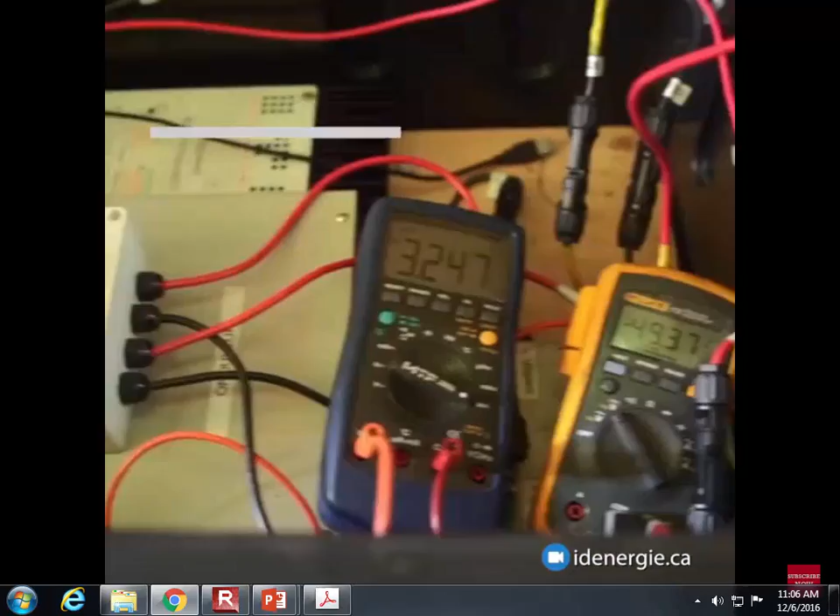How they tether the turbine to the bottom of the stream bed, I'm not sure about that, because potentially if you had a really heavy flow, it could get washed downstream. It looks pretty heavy, but another thing that I wondered about is bed load, the boulders that are on the stream bed. If you have a heavy stream flow, then those boulders will start moving, and I wonder if they've tested those to see what sort of a rock collision it can stand up to. But it seems really cool.

I'd love to have one at my house. Free electricity, it's the dream.

All right, so on the subject of hydropower, one of your problems for the assignment that's due on Thursday is this one, and it describes a similar situation, a house where they have an elevated reservoir and a penstock, which is just a pipe connecting the elevated reservoir to the generator shack. And there's 34 feet of head between the two reservoirs.

This problem is in mixed units, because although the length measurements are in feet and the flow rate is in traditional units as well, they want to know the power in terms of kilowatts. So we'll have to deal with the mixed units a little bit. Obviously, since we're in Chapter 7, the energy equation is going to be a big part of this problem. So there it is. You've seen it before.

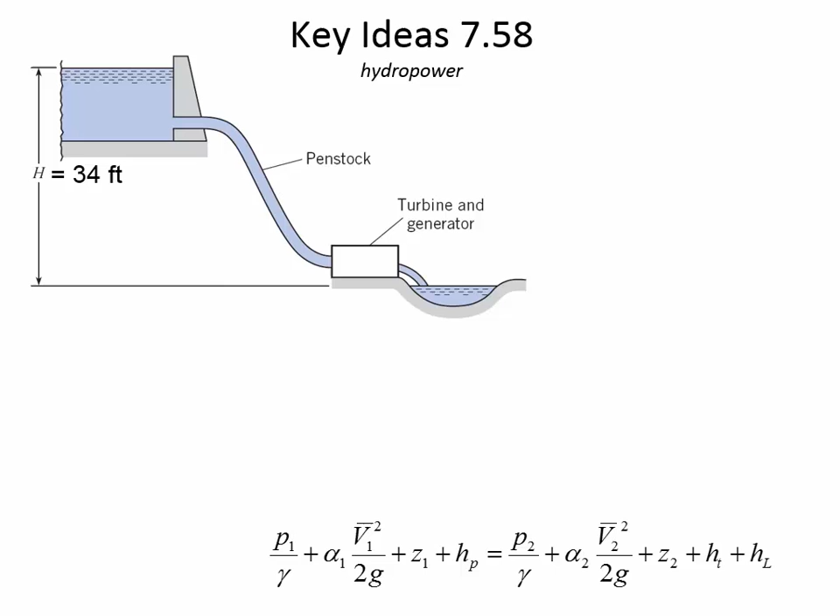They're asking to find how many kilowatts this situation can generate, first if there was no head loss and 100% efficiency. But then in the second, more realistic situation, of the 34 feet of head that's available, you have some allowance of around 5.5 feet due to head losses. That can account for both the pipe friction and the local losses at the inlet and through any bends that may exist.

So you allocate 5.5 feet of head to losses, and then you consider the efficiency of the two machines involved. There is an efficiency lost with the turbine, and another with the generator. We've talked about efficiency before and how that affects the power equation. Here's the power equation, and if it's 100% efficiency, you just use it as written. But we're trying to find how much power can be generated with a 70% efficient turbine and 90% efficient generator.

In the past, I've only given you one efficiency factor. You've never had to have two of them. So when you had one, in a situation like this, would you multiply by the efficiency factor or divide to find out how much power can be extracted from the system? Multiply, right, because any reduction below 100% efficiency gives us less power coming out. If you divided by 0.7, that would mean you actually have more power coming out because of the losses, and that doesn't make any sense. So you can always reason through the situation.

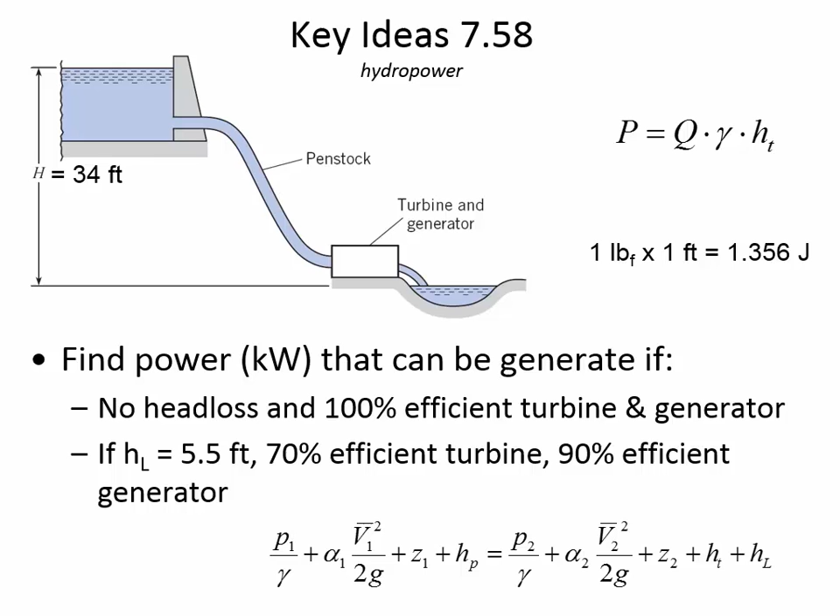So a joule per second, remember, is watts, and then the flow rate component will have seconds in it. So as you look at the units in this problem, it's in your book, but it's also here on the slide that there's 1.356 joules per foot-pound of force. All right.

Here's the last one I wanted to discuss with you, and that is you've got water flowing from one tank to another at a flow rate of 16 cubic feet per second. And again, we know the lengths of the pipe, the diameters, and they've even gone so far as to calculate the cross-sectional areas for you. What a nice gesture.

You have to calculate what is the elevation in the left reservoir that's causing this to happen. And that elevation will only be valid at a certain instant in time because, as the water is draining from the tank, the elevation is going to be getting lower and lower. So the elevation that you're calculating is at the point of time where the flow rate is 16 cubic feet per second.

Now they do give another formula for energy loss due to pipe friction, and an important thing to keep in mind is that you have two pipes with different diameters. So that means the velocity is going to be different in the small pipe compared to the large pipe here. So you can't just add the two lengths together. It would be wrong if you said L equals 500 and then you picked one of the velocities to put into that formula.

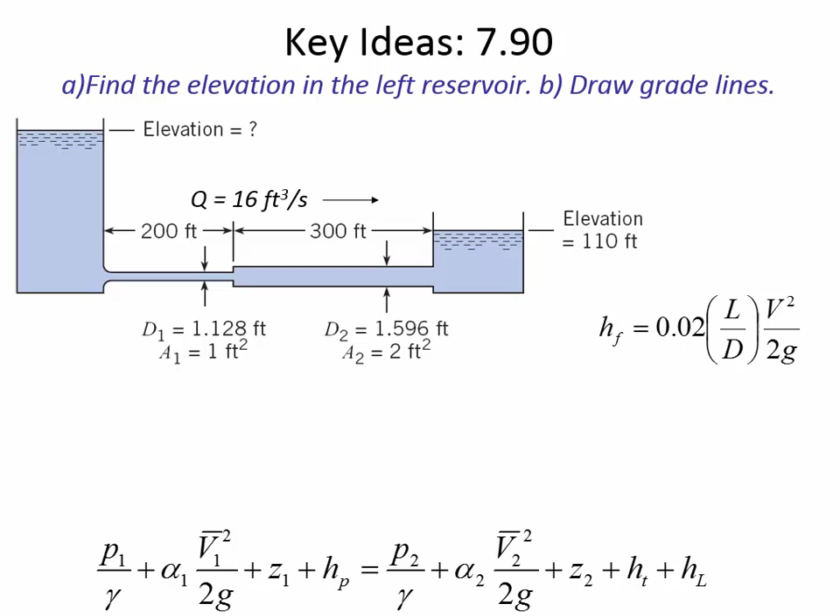The head loss through the first section has to be calculated using that section's length, that section's diameter, and that section's velocity. And then you also calculate the energy loss through the second section. But that's not the only energy loss, the pipe friction. In this one, you're actually also supposed to consider two local losses. So have a look at the picture. Where do you think the two local losses are that you're meant to consider?

Very good, the abrupt expansion. And the formula that you saw in class previously for head loss due to an abrupt expansion is one of the velocities minus the other squared divided by 2g. So that's the energy loss in an abrupt expansion. Where's the other one? They're saying that there's only two local losses. And so the expansion of the pipe is one of them. So now you've got to pick between the other two.

She said the inlet, meaning where the water's going from the tank into the pipe, and then the outlet. So you're saying the outlet? Yeah, and I think the reason why is that you see how they've got this taper on the drawing? You can minimize the energy loss by gradually transitioning the flow into the pipe. And even if it was an abrupt inlet, that's only 1/2 of the velocity head in comparison to all of the velocity head at the outlet. So if they're going to force us to choose which local losses to consider, I think it's the transition and the outlet that need to be considered.

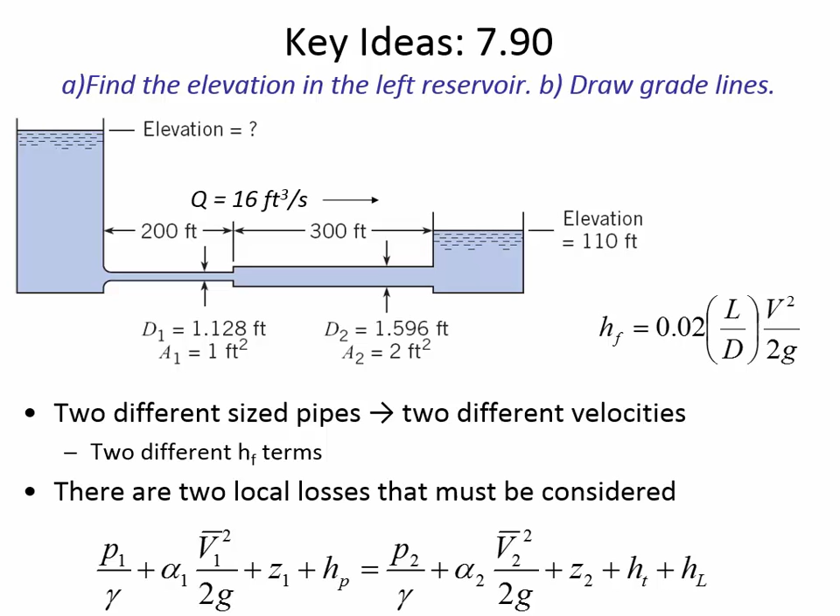We're not in a particular rush for once. It's the end of the semester and we got where we needed to be. We're not trying to make up time, so.

All right. Let's work through this one. This is a fairly complicated example that is going to give us some experience applying the energy equation with pumps. We have a tank that supplies our network, and we know the water surface elevation at the tank, and water goes into the pipe through a pump around a series of bends. We've got a couple of K values which define local losses, and then there's a building on a hill,

and anytime you look around at the rich people who live on the top of the hills, at least take comfort in the fact that they don't have good water pressure in their shower.

All right? We're going to take a look at this example here.

Ultimately, in part C, we're going to find out what's the water pressure at the top of the building. Because, you know, this pump is adding the energy that pressurizes the pipeline. It can only add so much. And in a city, if you add too much pressure, then the people who live at lower elevations are going to have their water heaters start to leak. That's usually the thing that leaks first, is water heaters.

And so there's only sort of a narrow range of acceptable pressures. Typically, it's from about 250 kilopascals to maybe 850 kilopascals. So there's kind of a narrow elevation range that you can service with a single pump. Yeah? The regulator can't change the pressure that comes in from the street.

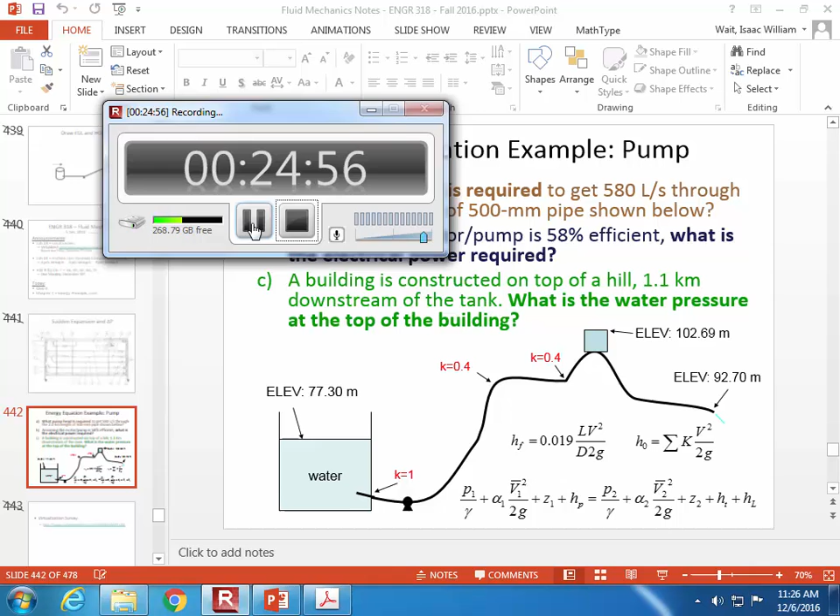Let's double check some of these numbers. All right, so hopefully you got that the cross-sectional area is about 0.196 meters squared, and from that you can get the velocity through the pipe, 2.954 meters per second. And then if you put all of that into the formula for the head loss due to pipe friction, you get that there's 33.8 meters of head lost due to pipe friction.

Now compare that to all of the local losses. If you add up all of the K values, we had one inlet loss at 1.0 and then two bends that were 0.4. So the sum of the K values is 1.8. And you multiply that by the velocity head and get that there's only 0.8 meters of loss due to the fittings, local losses. And so by comparison, you can see why they sometimes call these local losses, or they're sometimes known as minor losses.

But if we rearrange the energy equation to solve for HP, because it's the only unknown when we're starting with a tank, and we know that the tank is open to the atmosphere at location 1, so there's no pressure head there. The water isn't moving at location 1, so there's no velocity head there. It does have an elevation, and the elevation is specified, 77.3 meters. And so that's the starting point.

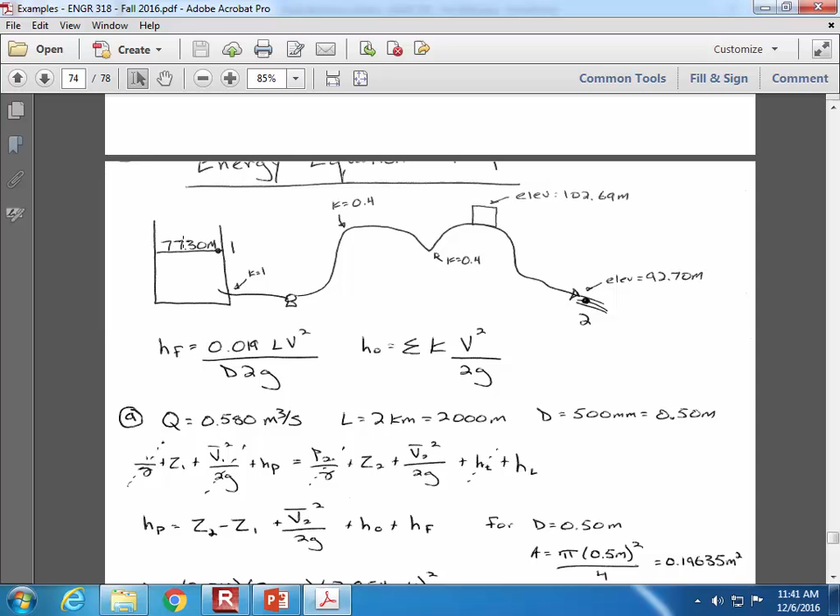That's location 1, and then we have losses as it flows. And so rearranging the energy equation in terms of HP, which is what it's asking for, the only terms that are left is you have to have the energy that the pump is adding to overcome the elevation difference, Z2 minus Z1. And then there's still velocity head as the water comes out of the outlet pipe. And so we list the velocity head at 2 as one of the terms. The pump has to provide energy for that velocity head to be there. Then the pump also has to provide enough energy to overcome the local and the friction losses.

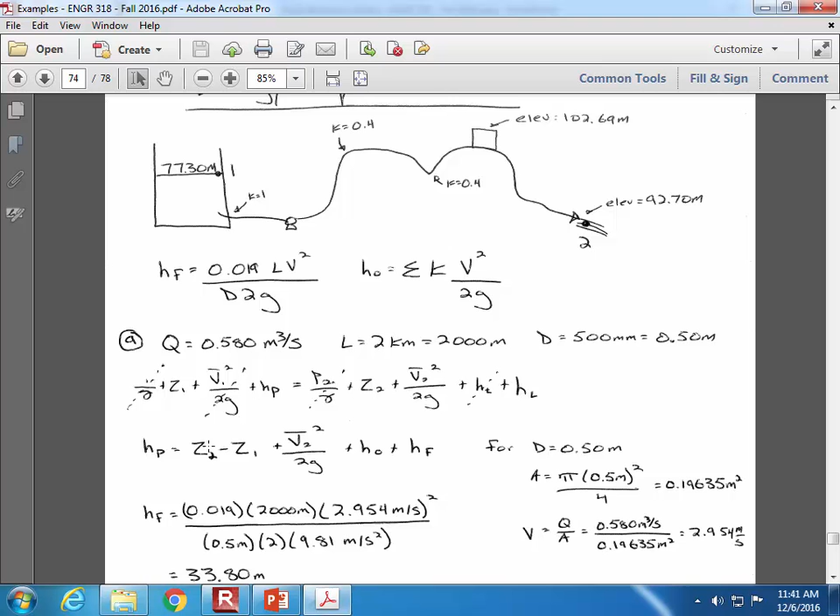So those are the terms that when we add it all together, that's why there needs to be 50.44 meters of head added by the pump. And you can see that I've identified each of the terms and their magnitude just so you can see, for example, that the majority of the pump head that's being added is due to pipe friction and the elevation difference. It's only a small amount of energy that the pump is adding in order to make sure that there's enough velocity head there at the outlet. Velocity head is always relatively small, and here it's only 0.44 meters of energy compared to the much larger magnitudes for the other terms, 0.8 for the local losses.

Yeah? The modified energy equation, how exactly do the local losses and friction losses come into play just from that energy equation? What's the modified energy equation? Well, I mean, you went from HL to H sub 0 plus H. Right. Okay. Good question. So here in the energy equation where it says HL, that means head loss is the sum of two terms. It's the friction losses and the local losses. And so we calculated both of those separately in this problem and then combined the two in for this term H sub L. Are there other questions?

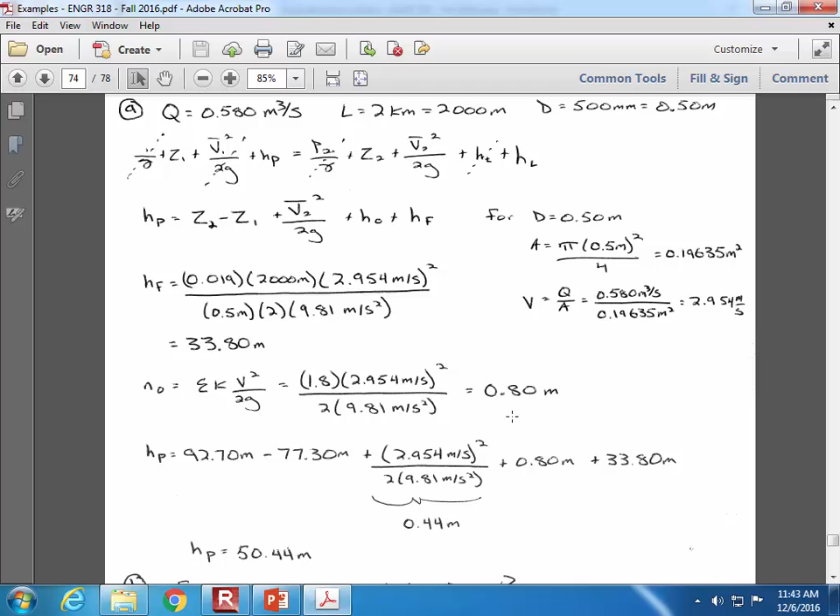No? All right, so part B of this is asking, assuming that the motor/pump is 58% efficient, what's the electrical power required? All right, so the power equation, you've seen it several times already today, but it is the power is the flow rate times the unit weight times the pump head. And then since we're talking about electrical power required, think about it rationally. We know a certain amount of power has to go into the water, but how much electricity has to go into the motor/pump in order to make that power go into the water? It's got to be more because of the losses. And so that means, in our case, we're going to be dividing by the efficiency factor to make the electrical requirements higher than the amount of power that actually goes into the water. Okay, so part B.

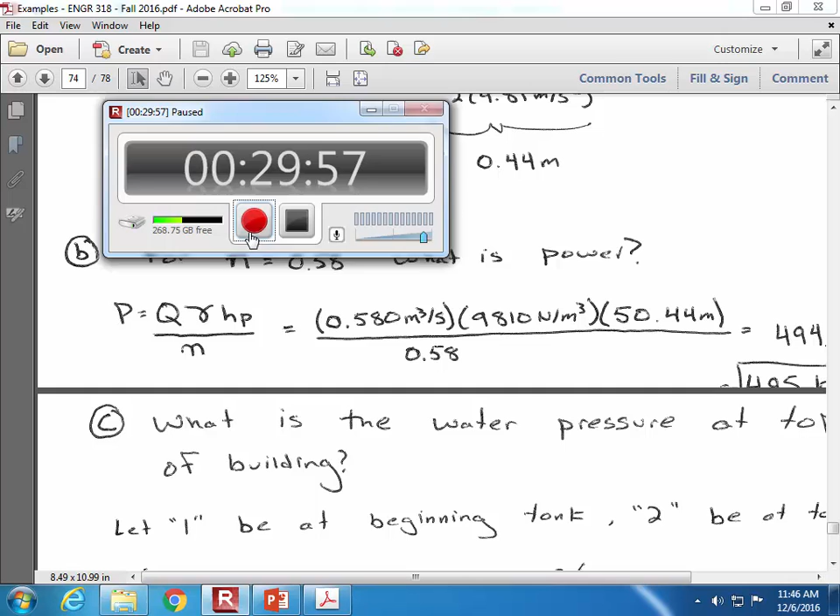All right, so you have to divide by the efficiency factor because the first thing that we did in Part A was we found out the amount of pump head that the system requires. And so you can't base your power requirements only on the pump head, because there are going to be losses inside of the motor and the pump. And so you have to put more energy into the motor/pump than you're going to get out of the motor/pump. So we add 494 kilowatts. Sorry that's cut off. It was A4 size paper and it scanned it in letter mode, so it sort of chopped off the top and the bottom a little bit. But it's 494 kilowatts.

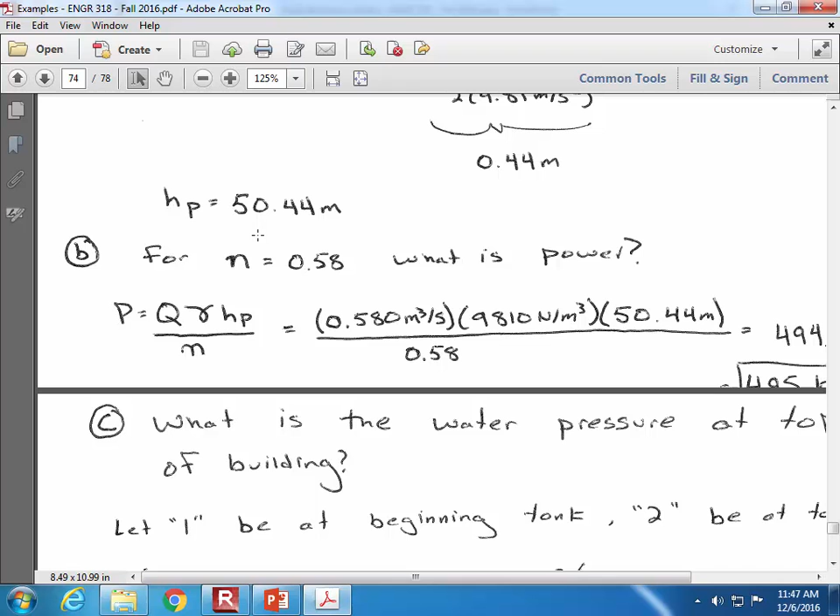All right. Now the last part, what is the water pressure at the top of the building? So here is the penthouse suite on the top of that fancy building there. Really looks like someplace I'd love to live. No windows or nothing. All right, 102.69 meters is the elevation of the top of the building there. So we want to find out what is the pressure.

Now, the head losses are going to be different than what we calculated in Part A, because the length is only part of the way through the system. So you're not going to use 2 kilometers for calculating the head losses. You'll use the distance of 1.1 kilometers. And then the elevation, the Z2, will be different than it was in the first part.

Finally, one other thing is assume that at the top of the building, what we're calculating is the static pressure, meaning the pressure in the faucet before you actually turn it on and the water begins to flow. So what that means is let the velocity of the water at location 2 be equal to 0. So here's 1 at the tank, 2 is at the top of the building, and the water velocity is 0 under static conditions. And that's what we want to know, is the static pressure.

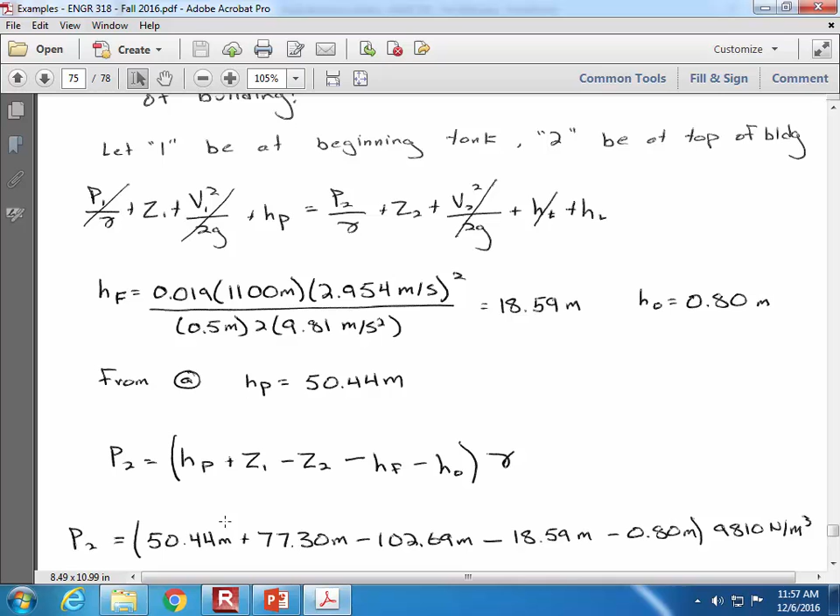So the only thing that's contributing to positive pressure at location 2 is the pump, but it's not giving very much pressure. That 56 kilopascals is below what's considered safe. Even in an emergency, water networks are supposed to maintain at least 140 kilopascals of pressure in order to keep something called backflow from coming into the system. What you don't want is someone to turn on their faucet and have the system start sucking air in. That's the situation that's known as backflow. And the reason why that's dangerous is that then you can have contamination in the water network.

Imagine flushing your toilet and the water goes the other way. That's not what you want, right? You want it to go down the drain and not back into the water pipe. So they set as a relative guideline that even during a fire, and that's when pipe networks are taxed the most, when the fire department is using a lot of water out of the network, the pressures will drop. But about 140 kilopascals should be maintained. And here we've only got 56.

And so those rich people in the penthouse suite, they're probably hating life. They can just get drops of water out of the shower head. Unless they put in a booster pump.

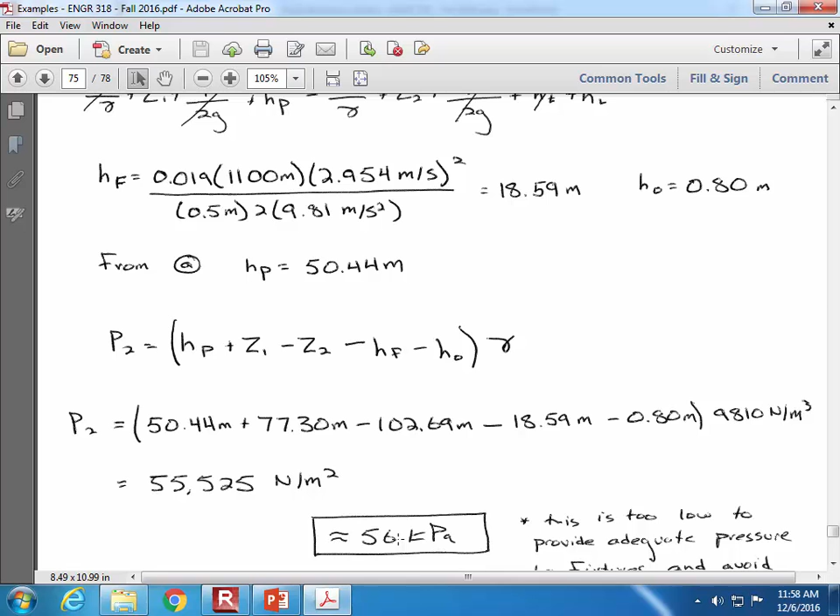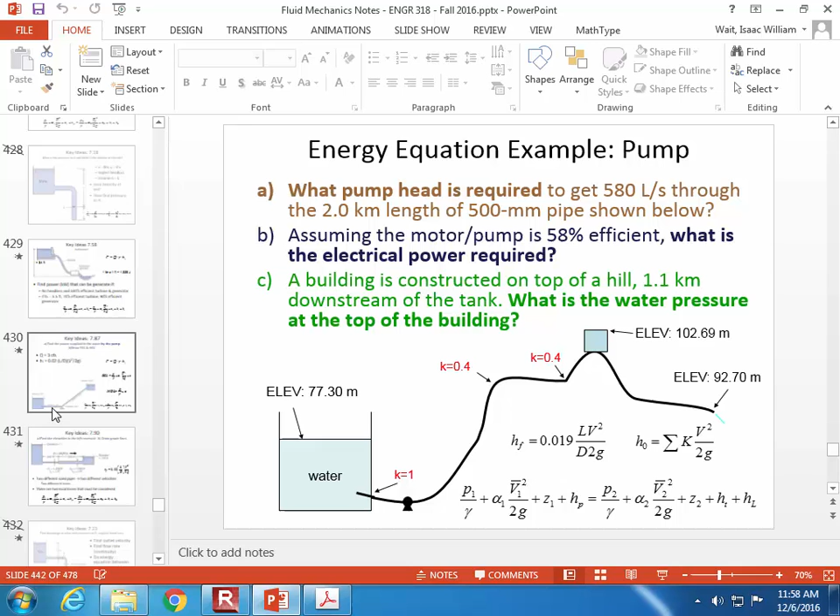But what happens to a pipe network inside the house during the fire? Does it just become open atmosphere? Are we talking about a fire in the house? So your house is on fire. What happens to the pipe network? That's your question? Yeah. Energy go into it? Because of the fire? Yeah. All right, so the flames heat up the water. I guess the water could start to boil. So that's cavitation, so it's going to begin expanding. I guess the pipes could burst, and if you're lucky, they'll burst in such a way that the spray pattern puts out the fire. And then it's freezing out, so the water freezes around it, seals up the burst pipe, and you come home none the wiser. Yeah. Hey, why is everything all wet?